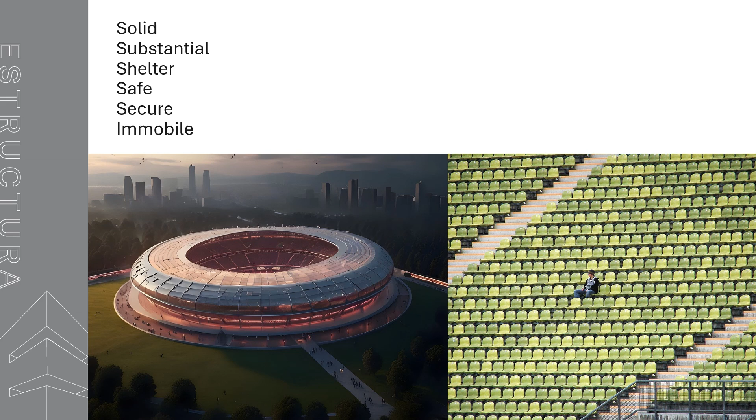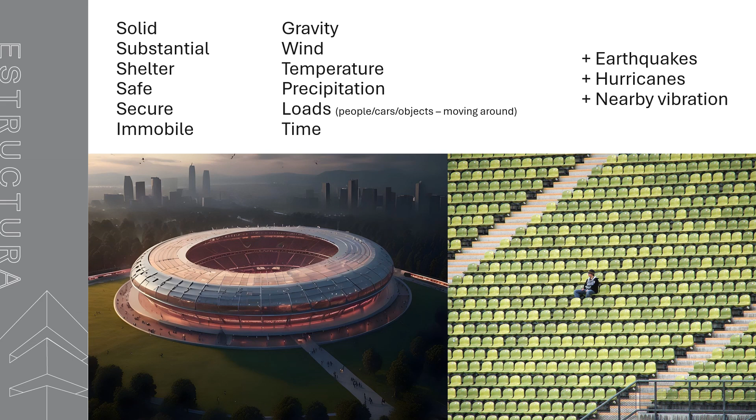But structures are actually under continuous pressure of various forces acting upon them: gravity, wind, temperature fluctuations, precipitation, the load of all the people using the building, and the shifting changes to that load as they move around the building, to name a few. Earthquakes and hurricanes can affect the building, as can vibration from nearby construction. What looks like a solid, immobile building is constantly reacting to these different forces, and we can't see it, but it is moving. The taller it is, the more it may sway, and time is its own unstoppable force.

Architects and engineers construct buildings with these loads in mind. This is why we know the maximum capacity for people on the rooftop or the maximum number of spaces in a parking garage. By setting occupancy limits and following them, building managers can prevent undue strain on the building's infrastructure, minimizing maintenance and repair costs.

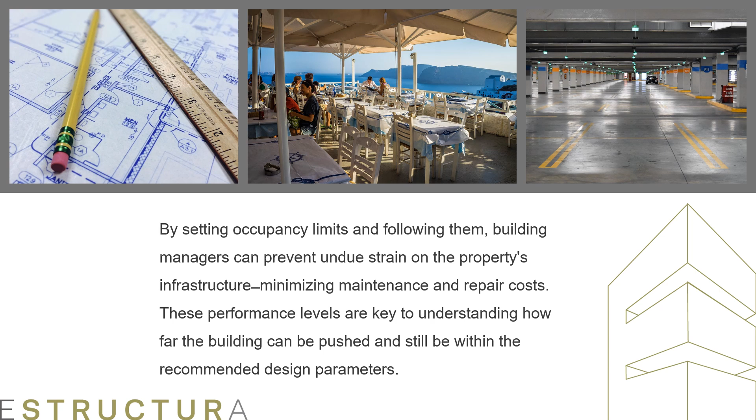These performance levels are key to understanding how far the building can be pushed and still be within the recommended design parameters. But how do we know the building hasn't been pushed too far? Is it still within the design criteria? Is it behaving as expected? Is there any unseen change that is affecting the building? Maybe we know it has endured big storms. Is it still okay? This is where structural health monitoring is a boon for building owners and managers.

When you have stadiums or arenas catering to tens of thousands of people gathered together, there are additional considerations. Structural safety: repeated jumping or moving in unison can increase the dynamic load on the building significantly.

Crowd control and safety: monitoring helps in crowd management by providing data on which areas of a stadium may have been affected by an event. In case of emergencies, this information can be critical for guiding evacuations and ensuring that all attendees are safe.

Preventing panic: in the event of an unexpected occurrence, like a small tremor or unexpected structural noise, real-time monitoring can help quickly assess the situation and prevent panic by providing immediate feedback that everything is within defined limits.

Optimizing design and maintenance: long-term data can help engineers and architects improve the design of future stadiums by understanding how structures respond to various loads. This data also helps create maintenance schedules, ensuring that the stadium remains in top condition over time.

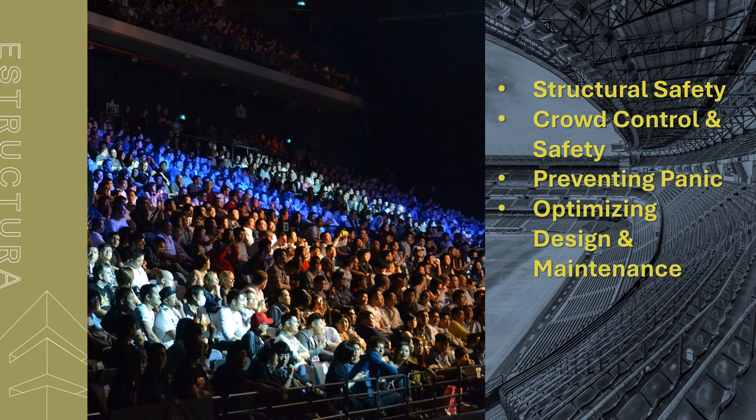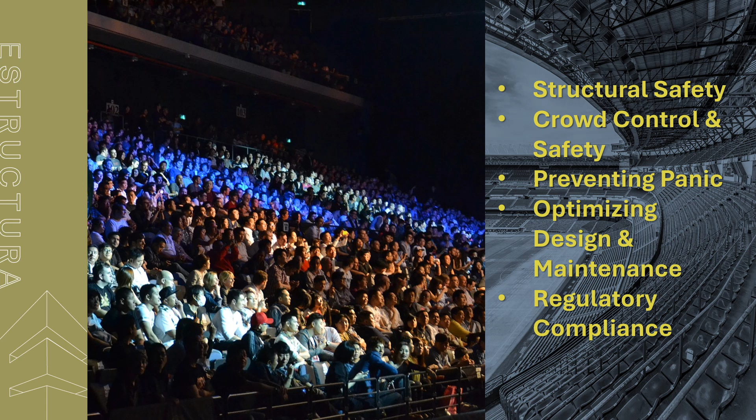Regulatory compliance: in many regions, regular monitoring of large structures like stadiums is required to ensure the venue meets all safety regulations and standards, protecting both the owners and the public. Along with fire and security monitoring, structural monitoring can provide assurance to building managers. Overall, the safety and well-being of thousands of spectators depend on effective monitoring of the stadium's operational conditions.

We'll use the Coliseo de Puerto Rico José Miguel Agrelot in San Juan as our case study. It opened in September 2004 to cater to up to 18,500 spectators at a time for a variety of events, including concerts and sports. As Puerto Rico is prone to earthquakes and seasonally may encounter high winds and hurricanes, and as the Coliseo has been serving large audiences for 20 years and has a duty to safeguard the public and the premises, the Coliseo implemented a Structural Health Monitoring, or SHM, solution in 2023.

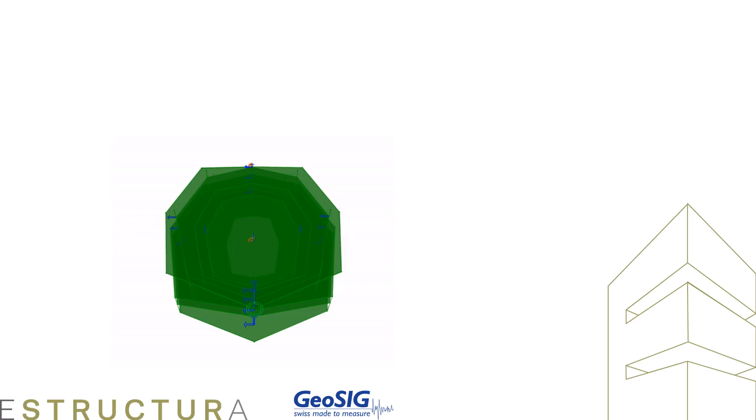With Estructura's SHM solution, the Coliseo had various GeoSIG sensors installed across the stadium, which were carefully mapped in GeoSIG's GeoSMART software. Just as a smartwatch can track your movements and vital signs, the GeoSIG sensors track the structure's continual and often imperceptible movements. The tailored solution then utilizes GeoSMART to retrieve live data from the sensors. These advanced tools provide valuable insights which can be used in real time or archived for long-term analysis spanning years.

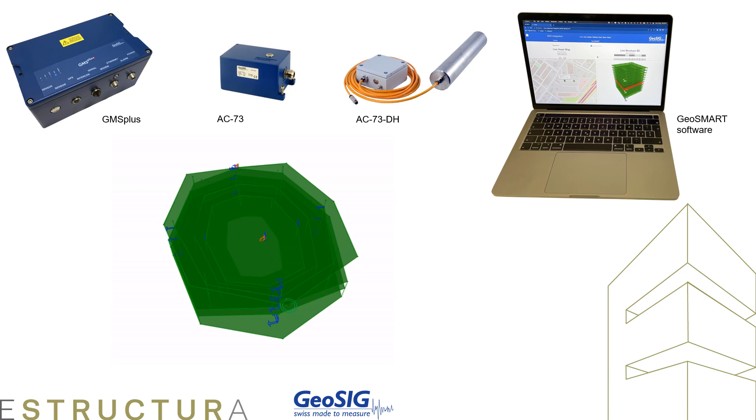This data is delivered through a straightforward, user-friendly web interface that allows the user to intuitively monitor the data and conduct deep analyses of the structure's behavior.

The software includes a 3D model representation that highlights observed exceedances of predefined thresholds on sensor channels, as well as the potential impact of those on structural elements.

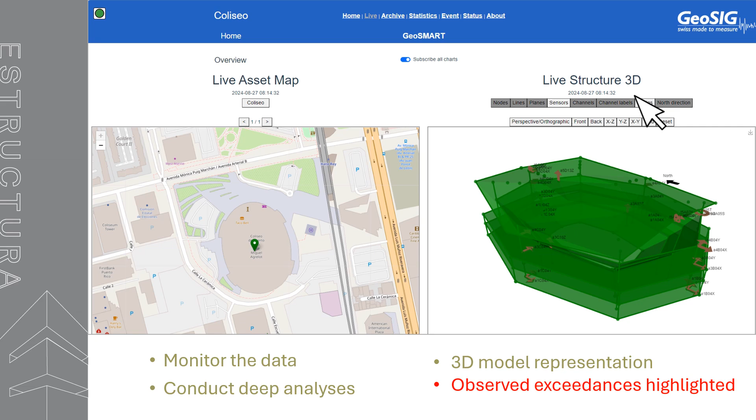By analyzing the live data, the software can extract crucial metrics such as frequency content and spectrogram, response spectrum, displacement, velocity, and interstory drift. The system is also highly adaptable, allowing for the integration of additional sensors.

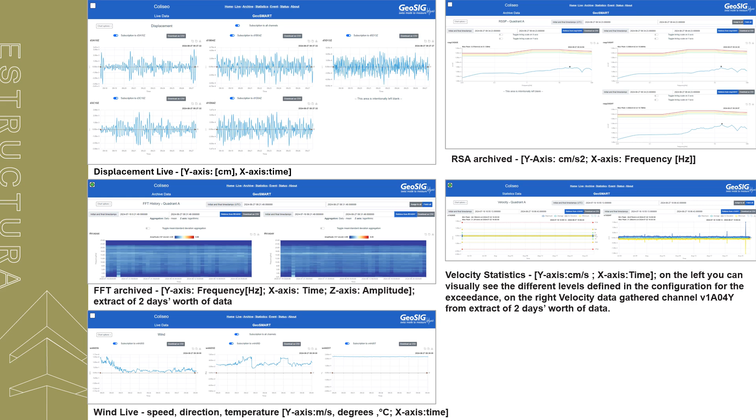Additional sensors can monitor things like tilt, temperature, wind speed, and direction, allowing for keeping an eye on other potential impacts on the structure. Over the long term, the same data shown in the live section are gathered and can be used.

This data can be used to monitor trends, detect damage early, evaluate seismic performance, plan maintenance, assess the building's behavior, particularly under high stress during major events, and ensure compliance with safety regulations, thereby enhancing the safety and longevity of the structure.

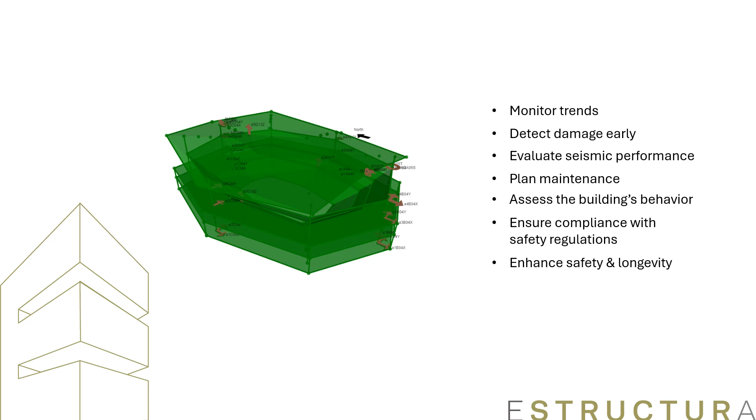The GeoSIG specialist can then customize each threshold using any device connected to the GeoSMART system based on the user's requirements. Color changes will be toggled in the 3D model when the defined thresholds are exceeded.

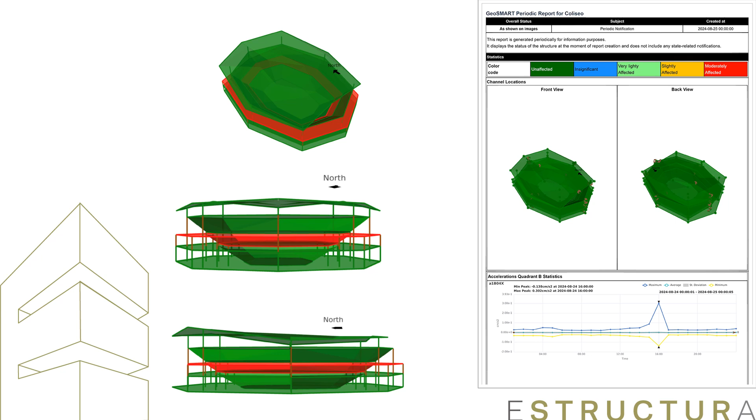GeoSMART also features a facility to create structural assessment reports or periodical status reports of the facility. These reports can also be sent via email to keep stakeholders informed.

Thanks to SHM, we were able to compare data from the excited, dancing crowds who attended three Bad Bunny concerts to the crowds for six games in a FIBA tournament, where the crowds showed less movement in the stands. The data show that the dancing crowds had much more impact on the building during the concerts.

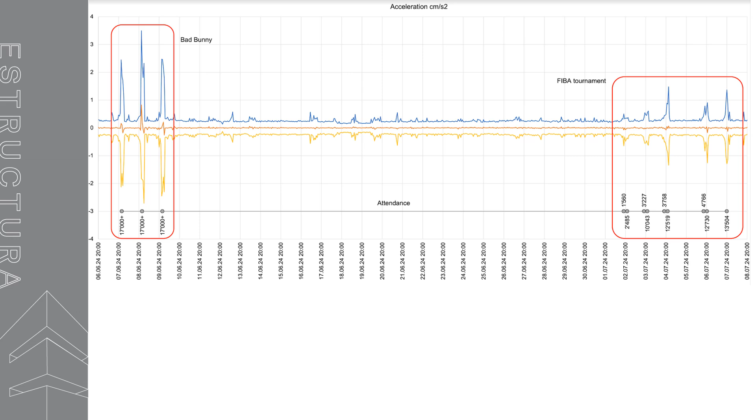These are the kinds of custom analyses that enable facilities managers to make decisions based on trends.

Structural health monitoring and sustainability are closely related in several important ways. First, prolonging infrastructure lifespan: SHM allows for continuous assessment of structures, helping identify potential issues before they lead to significant failures. By maintaining and optimizing the lifespan of structures, SHM contributes to resource conservation and reduces the need for new constructions.

Resource efficiency: by monitoring the condition of structures, SHM can inform maintenance and repair strategies, ensuring that resources are used efficiently. This can reduce waste associated with unnecessary repairs or premature replacements.

Minimizing environmental impact: a well-maintained structure typically has a lower environmental footprint. SHM helps ensure that structures perform effectively, reducing energy consumption and emissions during their operation.

Adaptive management: SHM systems can provide data that helps in making informed decisions regarding structural modifications and upgrades. This adaptive management supports sustainable practices by ensuring that changes align with current environmental and societal needs.

Disaster preparedness: SHM enhances resilience to natural disasters by providing real-time data on structural performance. This can aid in minimizing damage and improving recovery efforts, which is crucial for sustainable community planning.

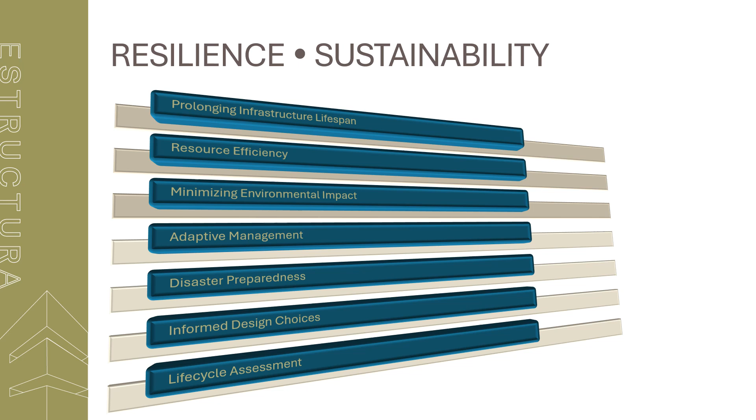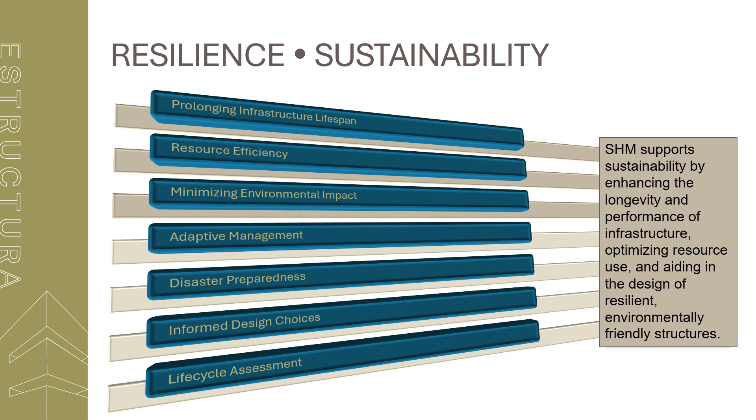In summary, SHM supports sustainability by enhancing the longevity and performance of infrastructure, optimizing resource use, and aiding in the design of resilient, environmentally friendly structures.

Estructura is a subsidiary of engineering firm Dorado Services, which was established more than 20 years ago. Estructura works in close partnership with Swiss manufacturer GeoSIG with the objective of creating awareness about structural health monitoring systems and offering SHM solutions tailored to the needs of the structure.

GeoSIG has more than 30 years' experience manufacturing precision instruments for earthquake, seismic, structural, dynamic, and static monitoring and measuring solutions. And now, are there any questions?